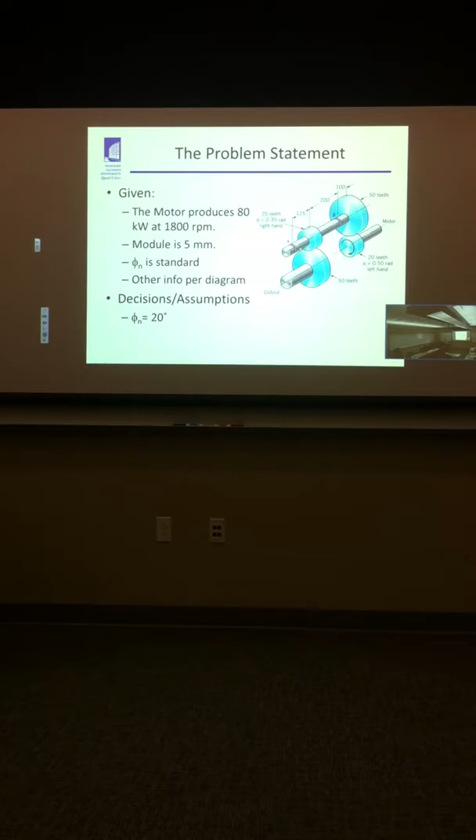All right, so here's the problem statement. 80 kilowatts at 1800 RPM, module is 5 millimeters. Next time we'll probably do a module of 7 or 8. It probably should have been bigger gears, but it works out. Phi sub n is standard, which is what? 20 degrees is the standard. Other information per the diagram and the decisions, assumptions: phi sub n, the phi in the normal direction, 20 degrees as we said. All right, so given that, first thing we're going to do is calculate all the torques and the speeds. So how do we do that? Start with the input one.

We don't cry. We're not wimps.

Tooth ratios. What's that? Tooth ratios. We can take a look at the tooth ratio. So if we want to calculate the speeds, the quickest way to do that is to look at the tooth ratios. So you got 1,800 coming in, and you've got 20 and 50 teeth. So what's the RPM of this one? 20 over 50 times 1,800, right? And that gives us, with my little Excel spreadsheet here. This is one of those things that works nicely for an Excel spreadsheet. So can we use one during the exam? No. Okay.

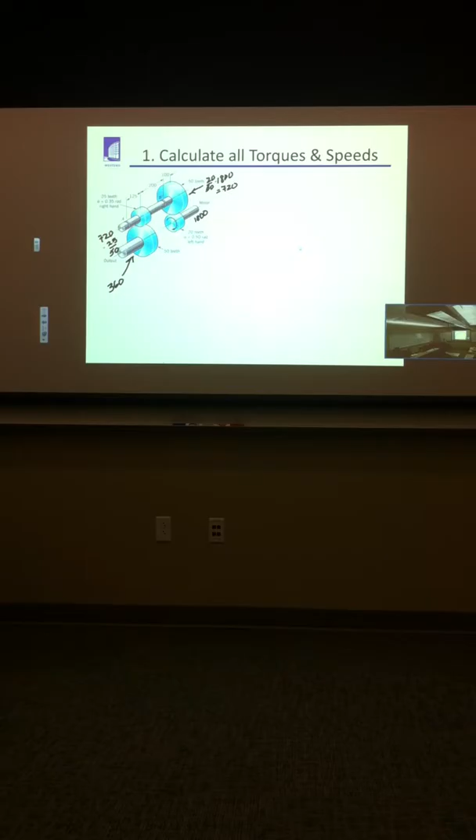Because I'm mean. All right, so whatever that is, and I guess I didn't print that one. 720, right? Sounds about right. And then over here, it's 720 times 25 over 50, and that gives you what? 360. Okay, so those are the RPMs. That one's answered. Now what?

Find the torque. Well, first of all, yeah, we can find the torque. We've got everything we need for the torque. So the torque is equal to the power, the watts, over the omega, which is 80,000 divided by 1,800 divided by 60 times 2 pi, and that gives you 424 Newton meters. Everybody get that? Okay, we're all looking good.

I didn't hear any gasp, so. That's what I did wrong. Or did I hear some gasp? Somebody faint back here? No. All right. My first mistake.

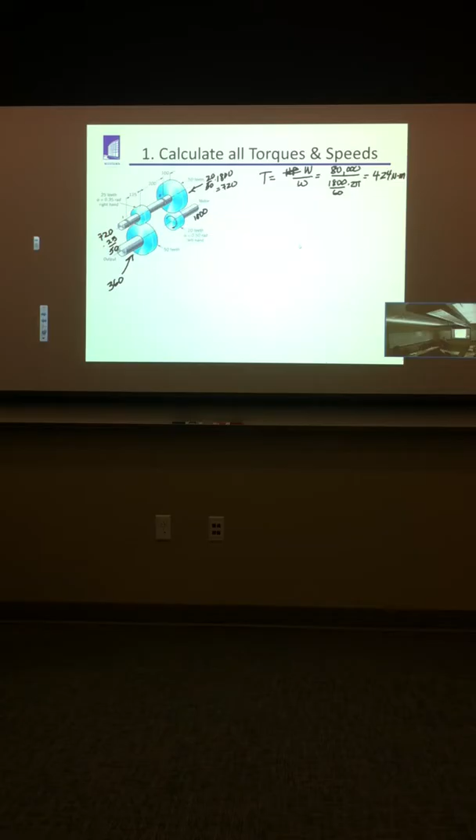Now to get anything else, you really gotta figure out what the diameters are. So how do we figure out what the diameters are? Use your little M. Okay, so first of all, we know that M is equal to 1 over P, right? And that the diameter is equal to N over P. And it's also equal to N over P cosine psi, which is going to be different for the high-speed side and the low speed. So we could say that diameter is equal to Mn N over cosine psi. So that's the equation that you should have been using.

So given that, what's the diameter of the input gear, the driving gear? Call them gear 1, 2, 3, and 4. The gear or the pinion? The pinion. I got 114 millimeters. You have to calculate M first, you don't have M. MN is given, and MN is normal, and M and MN are different. So M equals MN over cosine psi. A normal module. So if you calculate that, it's 5.697 millimeters per tooth. Damn, I got it wrong.

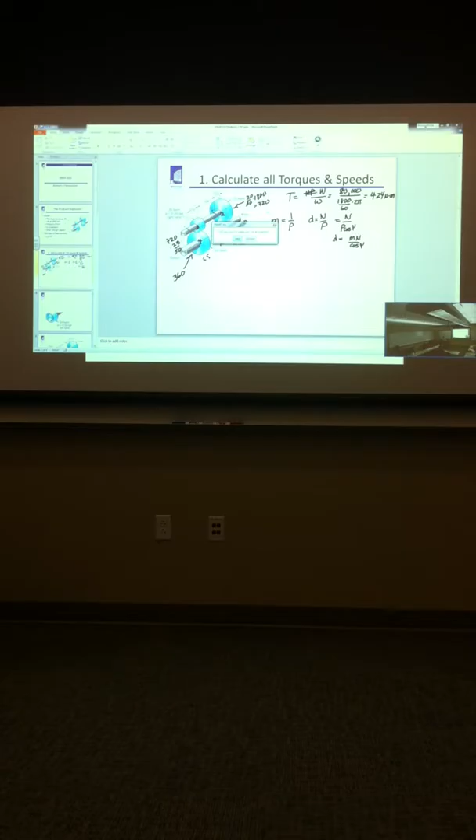No, you didn't. You had that in your Excel spreadsheet, I've seen it, and it was the same as mine. You calculated all that. Pull it up, it's on it. Yeah, but I think I changed it. I'm pretty sure you had the same numbers that I did. It's gonna be embarrassing, but that's okay, I can handle it. Hey, I'm recording this too. I'm probably gonna cry.

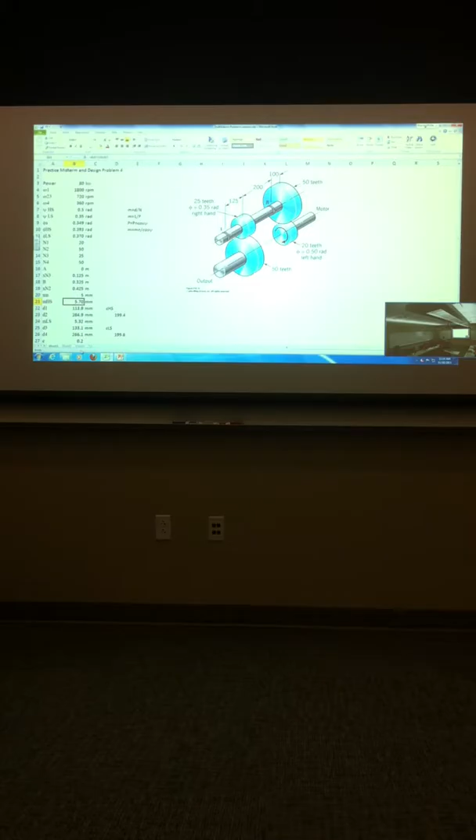Yeah, see, I have M in there. Is that what you guys got? Yes. That's M. That's what we got. Oh, yeah, okay. And 5.7 and 5.3. Yeah, so your D1 is 114. All right, I got it right. There's your equation up there, M equals MN over cosine psi. But you also skip a step, because you have to figure out M.

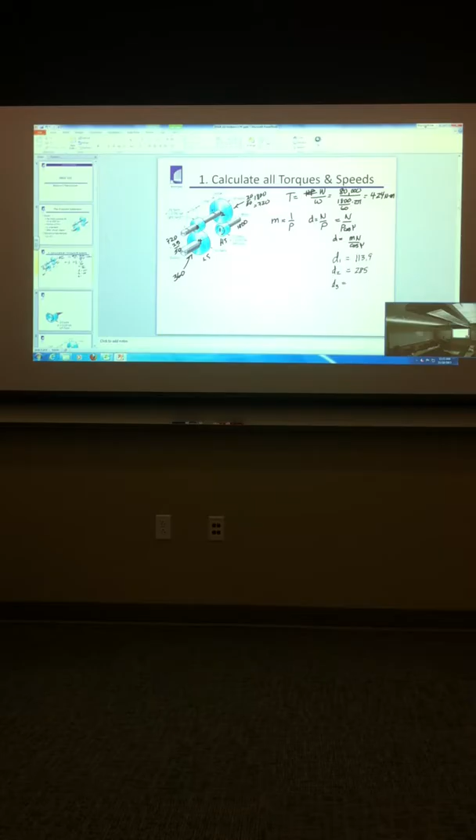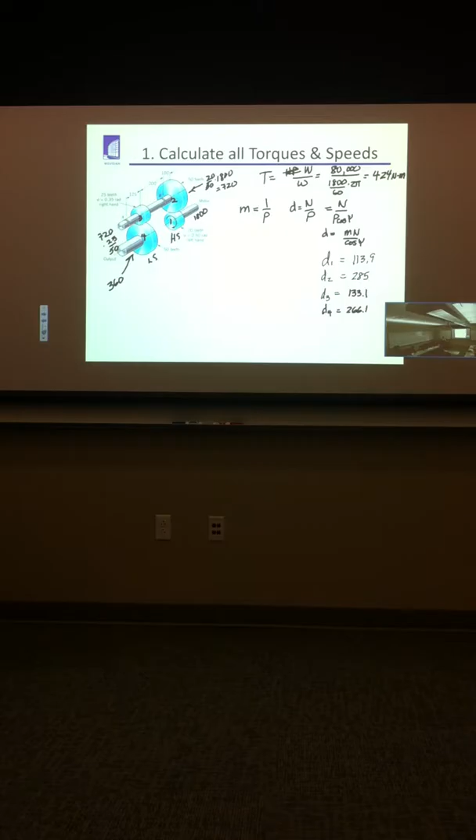So the diameter 1 is equal to, I got 113.9. Is that what you guys got? Yeah. Diameter 2 is 285. Diameter 3 is, oh, look at this, I'm not even in the presentation thing. Diameter 3 is 133.1. Diameter 4 is 266.1. Okay, so once we got that, then we can start doing some really cool stuff.

So, this first gear is rotating clockwise as we're looking at it from the end, and the torque is going the same way. That's a characteristic you're going to see on all driving gears: the torque and the rotation are in the same direction. For driven gears, rotation and torque are in opposite directions, okay? So then to get static equilibrium, I've got to have a tangential force at that point, at the top. And how do I calculate that? Well, I've got my torque.

Force times radius. T is equal to FR. Ft is equal to the torque divided by the radius, R1. So that's 424, if I remember correctly. Yes. All right, divided by 113.9, divided by 2, gives me 4, 5, no, let's see, 7.

7450. Okay. Newtons. Then the others, and that's from page, was it 682, I believe. Yeah, 682. All right, now, then

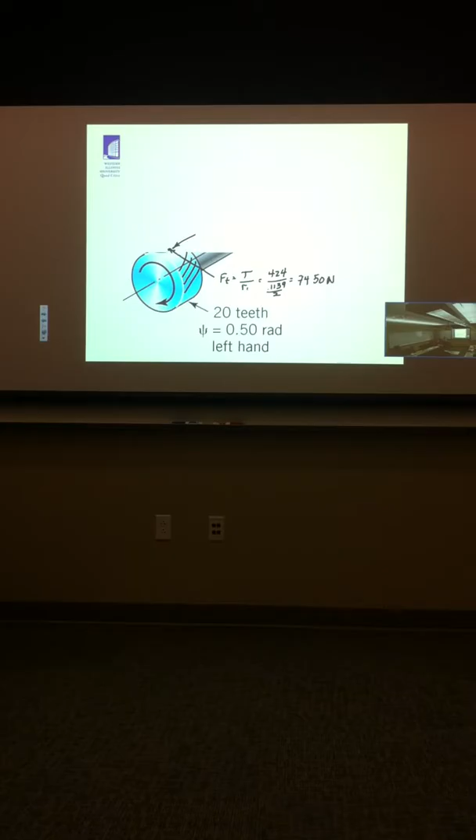because this is a left-hand thread, or left-hand gears rather, which go this way, then I've got an axial force, FA, which is equal to FT tan psi for these gears, which comes out to 7450 times tangent 0.5, which is equal to 4069 newtons. And then a radial force, which is Ft tan phi. So I got to figure out what phi is.

So how do I get phi? Tangent inverse. Inverse tangent of tan phi sub n, which was 20 degrees, over cosine psi, which is going to be different for the high-speed and the low-speed gears. So phi for the high-speed gears is going to be equal to 0.393 radians. And phi for the low-speed gears, 0.37 radians.

A quick question regarding the standard 20 degrees. Mm-hmm. In the book, it doesn't specify phi sub n or phi, it almost makes it seem like the standard is for phi, not for phi sub n. Yeah, except that that's true for spur gears, in other words, straight gears. But it doesn't specify phi sub n.

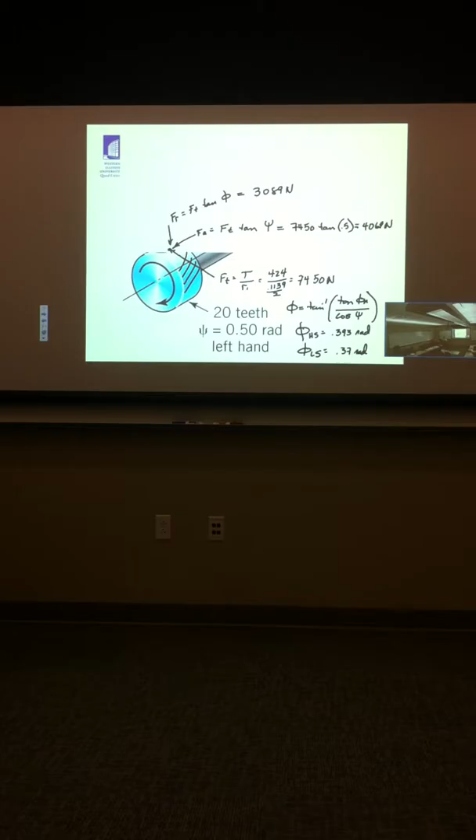All right, so, once you have that, then this becomes 3089 or 3090 newtons. And so we've got all the forces we need on that gear. Now, those forces are going to be reflected, equal and opposite, on the other gear, right? On the gear, this is the pinion. Okay? So that leads us to this next one, which is, how do we do this?

Well, the rotation and the torque are both in this direction, 424. The rotation on this one is in this direction, but the torque is going to be this direction. Why? Because we have an equal and opposite tangential force on that particular gear, and so the torque has to be in opposition to that. So what's going to be the torque? 1061 newton meters.

And we can get that by multiplying the 7450 times the radius, which is, I think it's 266, wasn't it? 285. 285 divided by 2. 285, 142.5.

Okay, so then that means that the rotation on this pinion gear over here is in the same direction, obviously, as this one, and the torque is in the same direction, because it has to oppose that one over there. So, what I wanted you to see, that on the driving gears, the torque and the rotation are in the same direction. Torque and rotation are going to be opposed for the driven gears. Okay?

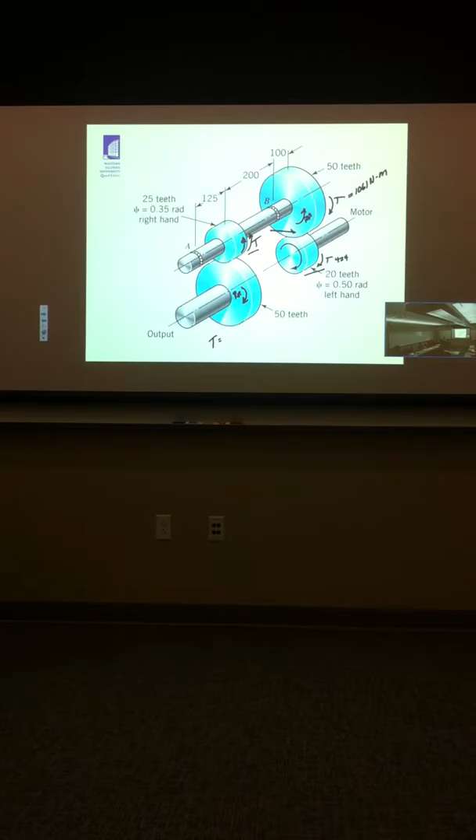All right, so the rotation in that direction. And the torque, we can get just by multiplying, torque is going to be double the one above, so the torque here is 2122 newton meters. So we got a couple of things already answered. Any questions on that?

All right, now we got to figure out what the gear forces are over here. So we know the rotation and the torque are counterclockwise, and this is a right-hand gear. Okay, so what's that going to do for us? I have to have a tangential force on this gear up here opposing that torque. So, did anybody figure that one out? It's just the torque divided by the radius.

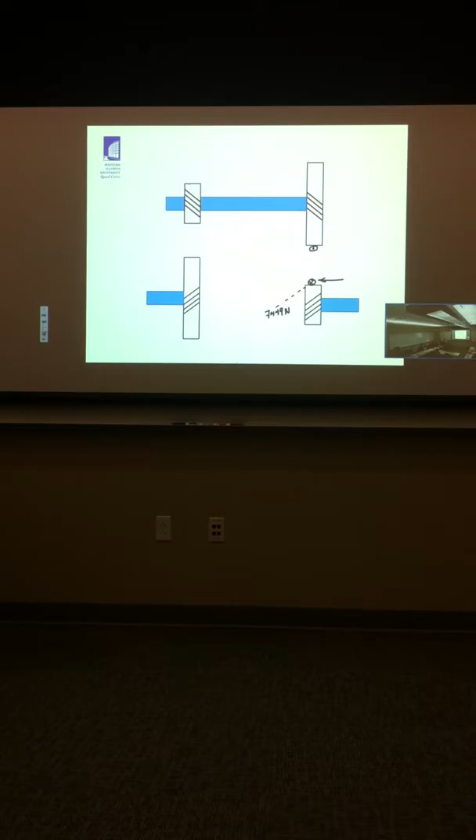And this gear down here has to be right hand or left hand? Left hand. Left hand. Okay, so now we got all the forces on the gears and everything, we can figure out what the forces are on the shaft. Okay, so we'll put those down. I use the convention of arrows, arrowheads or arrow tails, this being a tail, the other one being a head. And I also kind of draw it to the side like this, 7449 newtons.

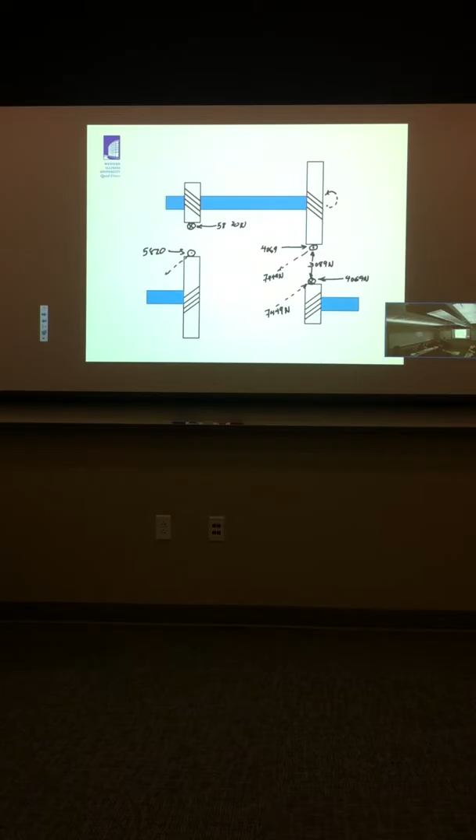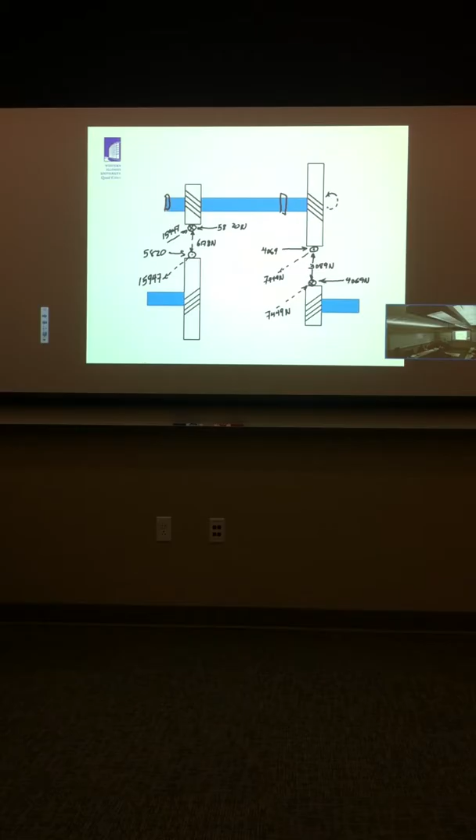Okay, so what does this do? This induces a concentrated moment right here at the point where the gear and the shaft are mated. This is side view. It's all on here though. Okay, so now we've got 580 newton meters here. That's what I calculated. Anything different? No. And then this one right here is 387 newton meters. And those only show up from the side. There's no concentrated moment showing up from the top. Okay? That's your Y, X plane.

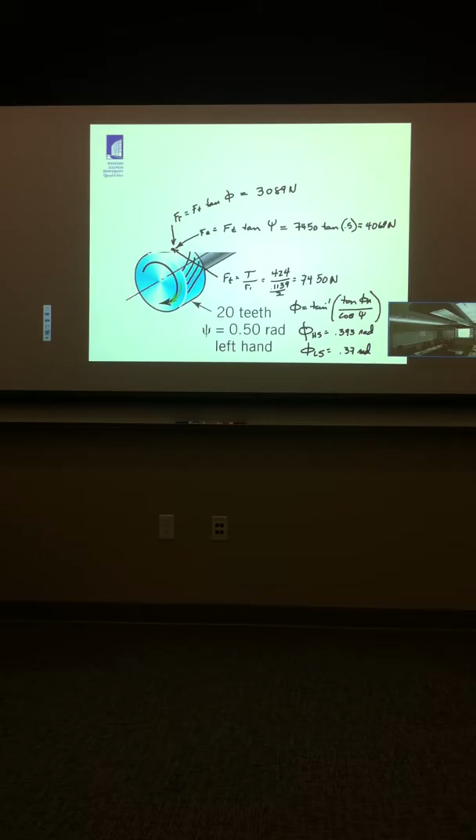We're talking about the top gear here, because that's the shaft we're working on, right? Well, what about the right side? Yeah, the actual gear. Right here. Okay, this one right here. No, not that one. So the torque and the rotation are going to the right, the FT has to oppose it going in. I get that, but why is it on a pinion and a gear they're different? Which way the torque is or something you said. Will you go back to where we had the whole thing, showing all the gears?

Right here? Yeah. Let's just do a quick one right here. So this gear is rotating, torquing this way, it has to be opposed by a force going this way, right? That has to have an equal and opposite one here, which has to be opposed by a torque this way. So the rotation here, rotation this way, rotation and torque are different. And that cute little site that we gave you the link to, I printed this, I checked my answer against this, just to make sure.

Okay? What site? I'm not above making mistakes. I put my pants on one leg at a time, so I'm human. Okay? But I use this. You want me to pass this around? What site is that? You got email, or it's an update on the class page, you made an announcement, that link gives you a link to a PDF file. It's a nice PDF, except it gives things in kilogram force. What kind of unit is kilogram force?

Dr. Pat, I have one question about that site, the PDF. It gives things in kilogram force, what is that? It gives things in kgf. That's the unit. Pound force, pound mass, kilograms. Yeah, I didn't know that metric had a kilogram force. You know, like the pound mass deal. I think that's probably a typo.

Kilograms, round up. I'm pretty sure it said kgf. KGF, KGM, same thing. All right, let's take a 2-minute break.

Mr. Regal, would you please go down, you know where the techs are? They're in the room right next to the secretaries. Secretaries are in 217, it's the one right next to it. Okay. Go in there and ask one of those guys to come and remove this stupid thing from my screen. Thanks. Can we have our papers back during our 2-minute break? Why, to change them? I was thinking too. No. Okay.

So that pin. All right, but you asked, so let me tell you what I'm doing with this. I only need 8 more points to give us an even 400 points for the homework, right? However, this one's counting for 20. If you say "oh" after this, then I won't do that. But if you get more than 8 points, those are like bonus points. So anybody want to complain? I didn't think so.

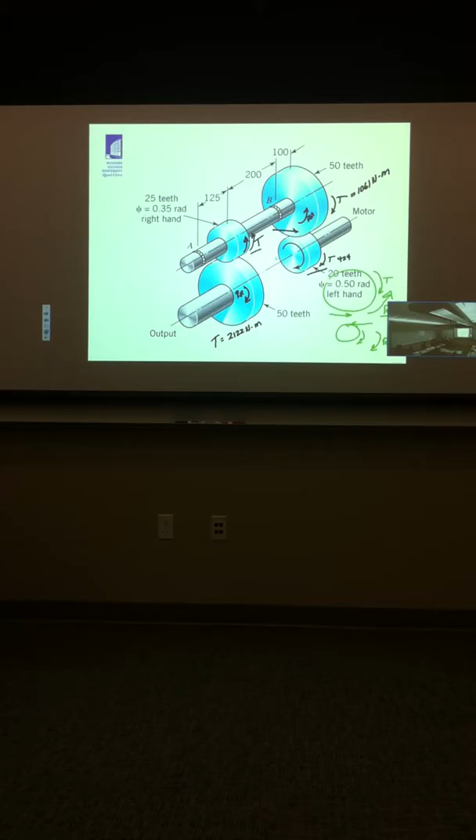All right, so how do I figure out which way the tangential force is going? Very simply, put the force on there that is needed for static equilibrium, okay? If I didn't have a tangential force opposing that torque, what would happen to the pinion? It would accelerate, theoretically infinitely. Okay, so don't overthink it. But the tangential force acting on that shaft is in the positive direction. You have a torque going up for your torque diagram, and then a torque going back down, so it makes sense, right? You have it as a negative.

Wait. You gotta do that wrong. Here you want the force on that shaft. You didn't bring a copy? You were supposed to make a copy of it. The scanner downstairs wasn't working. You just gotta get 8 points, man. I'm not even getting 8 points on that. My numbers all match, my forces and everything. I just did that straight in there, I didn't go up and then over. When I got to the singularity functions, I was like, oh, that one's not right. And I ended up getting a negative number somewhere. I spent hours on that.

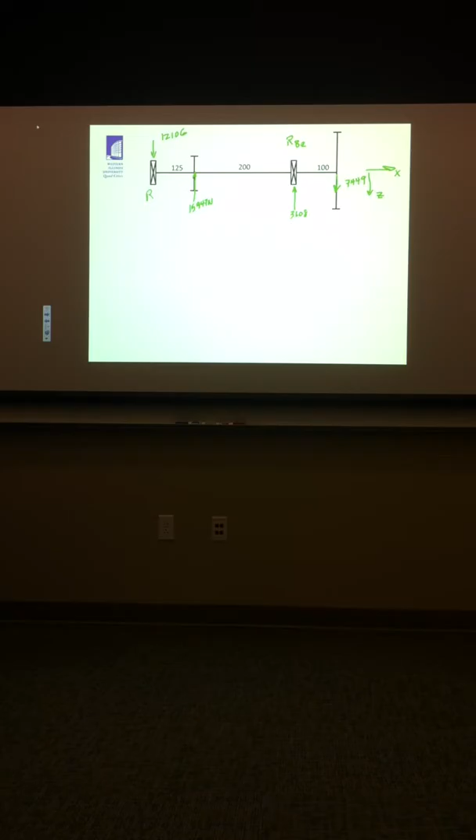All right, folks, let's keep going. Does anyone have a question on which way these forces go? I have argued this with Jared while we were taking our little break, and I am convinced I'm right. Anyone want to challenge it? Yeah, the 7449, I agree if your Z is down, positive, but then the 15 will go. Well, because I'm looking top down. So my Y was going straight up, and the right-hand rule says that my Z will be pointing down.

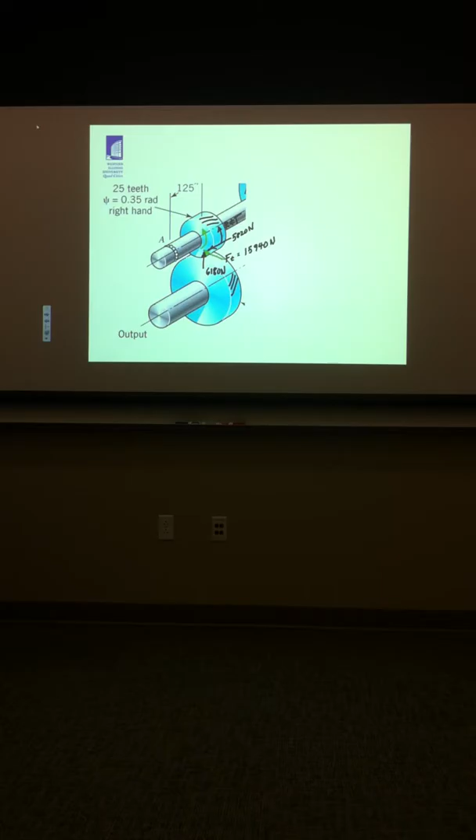Okay? So I've got the gear force from the 1-2 gear combination, 7449 newtons pointing down, positive Z direction. I've got the pinion force that opposes that torque pointing up in the negative Z direction. And then I can do the sum of the moments about A or B, whatever you want, you can check them. And I got 3608 reaction negative here and 12106 positive. Can you explain why the 15947 is in the negative direction? Okay, one last time, we're not gonna argue, okay? All right.

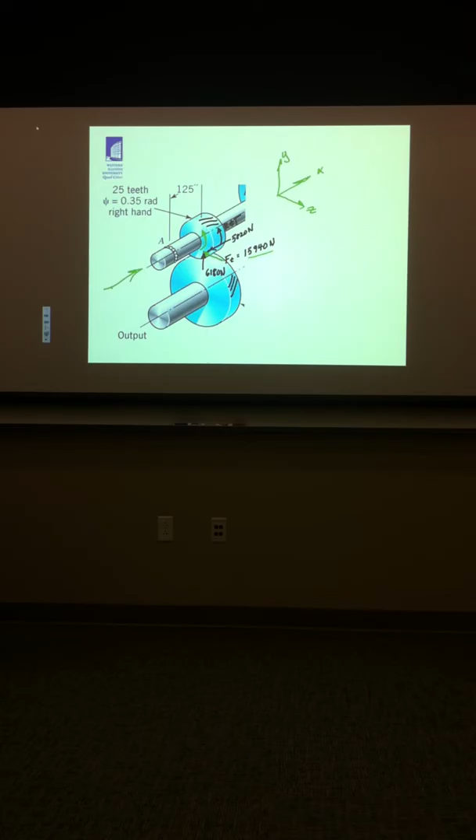Remember we said that the torque and rotation were both counterclockwise looking at it from this end on the pinion, right? Gear number 3. That has to be opposed by a force on the pinion gear that we calculated at 15,940. My coordinate system is X positive that way, Y positive this way, and Z positive this way. So it's opposite Z. There's my positive Z axis. Does everybody see that? Okay. All right, so let's move along.

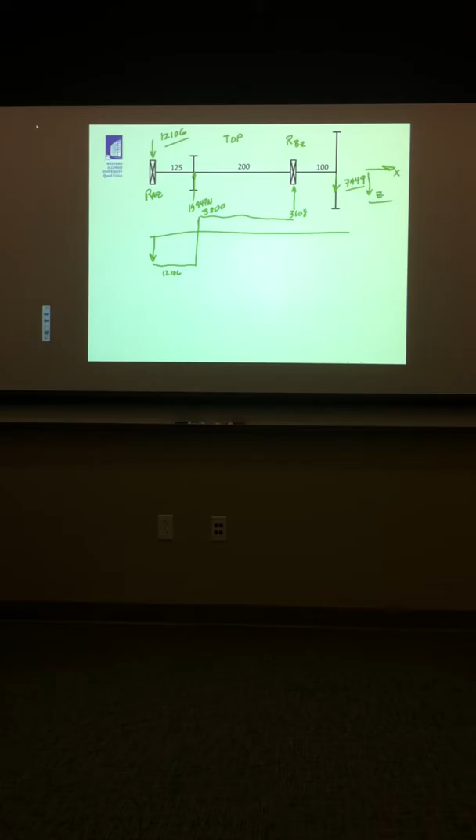So that gives us those forces, and now it's just a very simple shear moment diagram. There goes some bonus points. Okay, shear moment diagram, 12,106 positive, then down 15,000, which puts it, I don't know, whatever the difference is, looks like 3 and some change, 3,800 or something like that. I didn't do a shear moment diagram on this. Then it's going to go negative some more, and then up 7449.

Now, you can calculate all that, but really this one was just simpler for me if I just wrote the singularity function. Okay? Now, to calculate the shaft diameter, I wrote singularity functions. You can do it on your own, or do you want me to go through it? I mean, we've got time. Let's go through it. Well, we'll go through this one. Okay, so I'm going to erase the shear here because it's kind of getting in the way. Oops, I didn't need to erase that.

Can we go to where you tell us how you combine them to get the diameter? I don't understand that part. Well, in fact, when I solved this thing, I didn't combine them. I just solved for the displacement in both directions, on each, using singularity functions.

So this first one, V is equal to 12,106 x to the 0, minus 15,947 times x minus 0.125 to the 0, minus 3608 times x minus 0.325 to the 0. And the moment is just 12,106 x minus 15,947 times x minus 0.125.

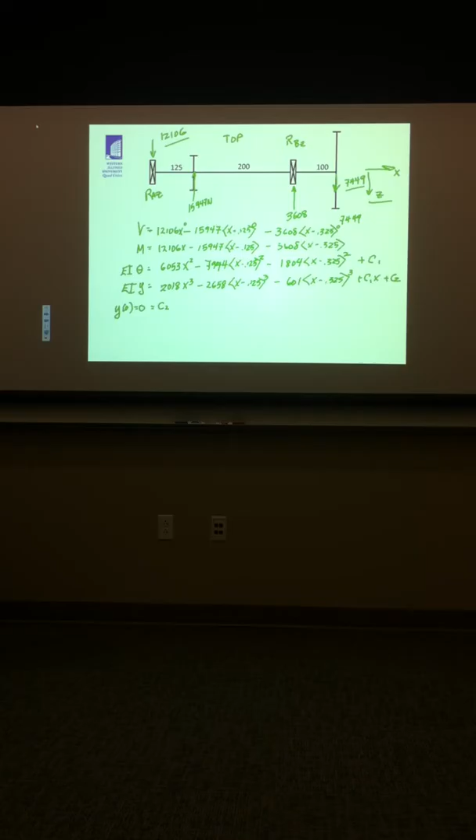Which one are we talking about? At the bearing or the? At the bearing. So at RA, at y. I thought it was at the gear, the displacement. No, hang on a second, I've got to have a place where it's going to be 0, right? And the assumption is that that's going to occur wherever the bearings are, okay? The displacement's got to be 0 there, otherwise I got a screwed up bearing. All right, so y at 0 is going to be equal to 0, correct? That means that C2 is equal to 0. Okay?

Now, the other place it's going to be 0 is where? At the other bearing? Bearing B. Right, so y at 0.325 is going to be equal to 0. So I substitute all that in, and I get C1 is equal to 148. Should be negative, probably, because I got my sign screwed up, but it doesn't matter.

Okay, so once I have the constant, then I can go in and say, what are the displacements at my gears, or pinions? 0.0001 meters. So I'm saying that y has got to be equal to 0.0001 as a goal, or less, at 0.125. And so I could say EI is that times EI, and then substitute in at the different points. So I end up with a formula that goes like this. Okay? And then all I have to do, once I get the figure, is solve for D.

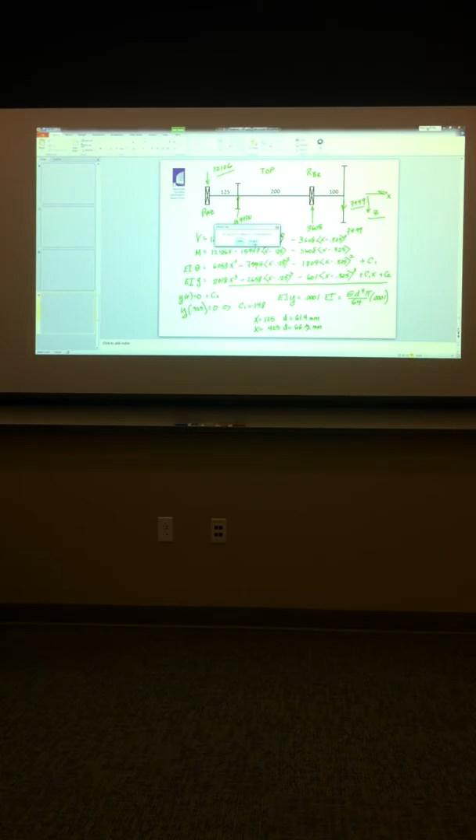Can I ask you a question on assumptions? Yeah. When we're looking at both the x y and the x z plane, is it safe to assume that since on the XZ plane the forces are larger, we should evaluate this shaft with the singularity function to get the higher? Well, I did both. I evaluated both directions, side and top, using singularity functions. But to save time, can we make that assumption? No, I don't think so. I think you gotta check it.

Now, how do we do the other singularity function? What do you mean how to do the other singularity functions? He's got to do singularity function for both the x y and x z plane. Okay, so that was from the top down. That one was the easiest one. So you might be wondering about the singularity functions on the other one. Okay, so singularity on the other, I wrote down V, let's see, we're gonna use the blue one.

So that error on the shear moment diagram probably explains why I got a negative number on one. Then you're gonna pick the higher radius, right? To compensate for both. Yeah. So I'm just gonna get you started on this. Okay, minus 7009, x minus 0.325 to the 0 power.

Then you do the moment. Moment's a little bit different. So this comes out at minus 2258 x plus 6178. This is y, or yx. Now I've got to add in something that's going to take care of my concentrated moments, right? So what I did was I added 387 x minus 0.125 to the 0 power. So there's my concentrated moment.

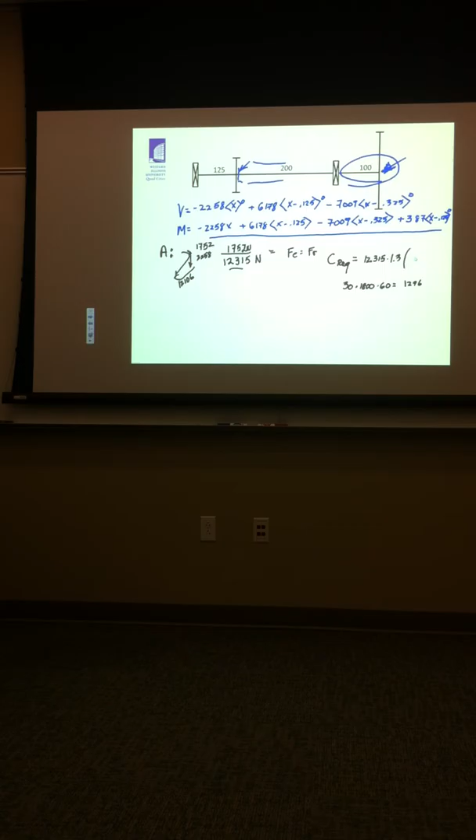And then I've gotta figure out what my life is. So if this is a machine that's gonna be used 8 hours a day, every working day, then it's 20 to 30,000 hours. Again, I'm gonna be conservative, which is 30. And I multiply that times 1800 RPM times 60, and I get, let's see, 1296 times 10 to the 6 revolutions. So I put that in here.

Divide by 90 times 10 to the 6, and then my KR is just 1.0 because I'm interested in the 90 percentile, right? And that's to the 0.3, and that gives me my C required of 35 kilonewtons. So now I can go and look. Thanks for catching me on that. Getting too far ahead of myself. Okay, so now I can go in and take a look. So which bearing is going to work? Well, none in the 70 to 80 will work, but the angular bearing will.

Why are we using 1800 when it's 720? Oh, dang it. Yeah, the shaft is 720. I hate that when that happens. You caught me. Okay, I lose some points. Does that mean we gain points? It's all right. You can have those points. All right, so you're right. Thank you, Troy. I'm big enough to admit my mistake.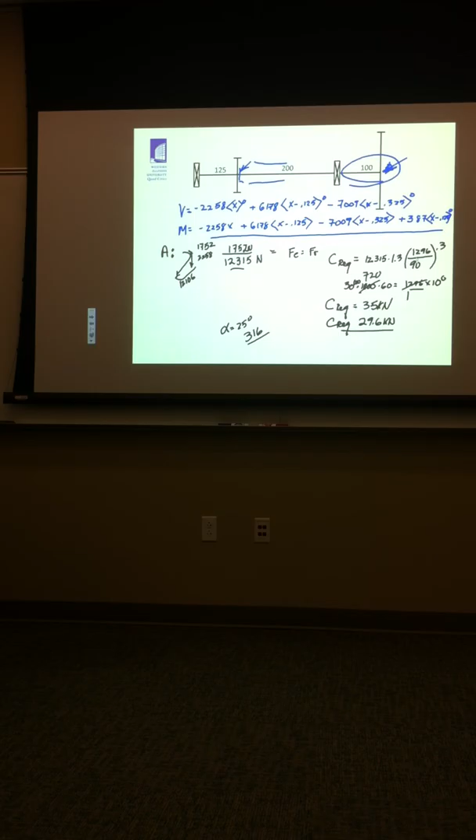Can you touch on which bearings take the thrust or not? Okay, so which bearing should take the thrust? Doesn't matter. If I use the alpha 25 degrees 316, I can place those bearings so they oppose each other and just lock the shaft in place. Then I don't have to worry about it. If I could get bigger, heavy duty ball bearings, the ball bearings themselves would do it. But there's a resultant thrust, so something has to counteract the thrust. So one of them has to be a thrust bearing, or both of them have to be thrust.